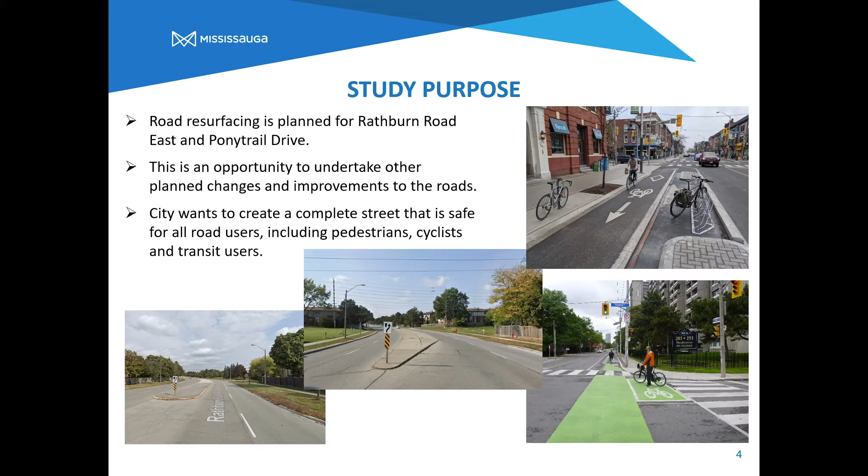The project study area includes Rathburn Road East from Dixie Road to Etobicoke Creek and Ponytrail Drive from Rathburn Road East to Burnhamthorpe Road East. Rathburn Road East and Ponytrail Drive are designated as major collector roads and a key transportation link for local movement of people within the Rockwood Village neighborhood in the city of Mississauga. Rathburn Road East and Ponytrail Drive connects both Dixie Road and Burnhamthorpe Road East. Within the study area, Rathburn Road East and Ponytrail Drive have a posted speed limit of 50 kilometers per hour.

The oldest section of Rathburn Road is east of Fieldgate Drive, which was built in 1976. Over the years, Rathburn Road has gone through extensions and improvements and is in its current configuration since 1990.

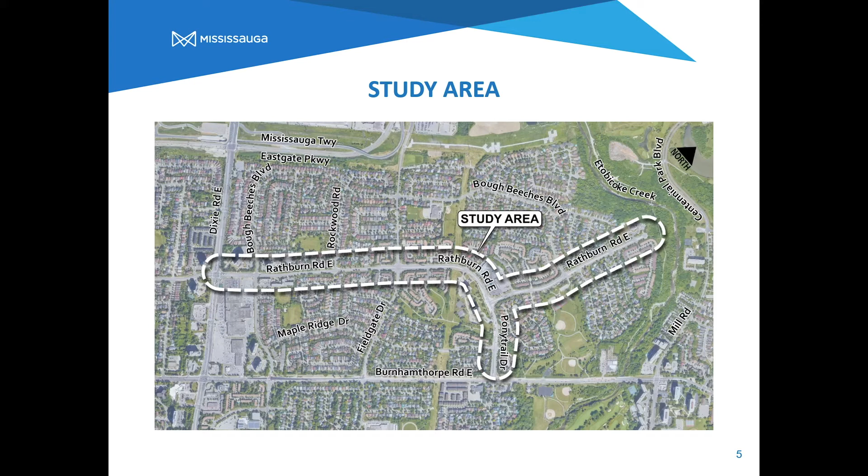As part of the upcoming road resurfacing program, the city identified an opportunity to re-evaluate and implement roadway changes to balance the needs of all road users and improve safety. By completing these projects simultaneously, rather than staggering the construction of the road resurfacing work and other improvements, it will decrease the amount of construction and disturbance to residents and road users within and adjacent to the study area.

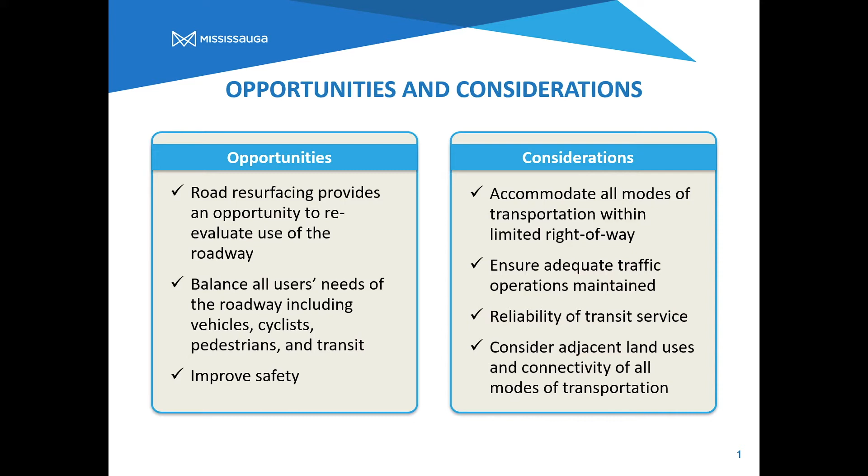Through this study, it has considered constraints within the study area, including the ability to accommodate all modes of transportation within the limited right-of-way, as well as ensuring adequate traffic operations are maintained, the reliability of transit services, and the adjacent land use and connectivity for all modes of transportation.

The implementation of a complete street design, including cycling facilities, is consistent with and supported by provincial, regional, and local plans and policies. Here are a number of relevant documents, for example, the Provincial Policy Statement, A Place to Grow, Cycle On, and the 2041 Regional Transportation Plan.

These provide provincial direction that encourages sustainable modes of transportation in suburban and urban settings. At the regional level, the Region of Peel's official plan, Sustainable Transportation Strategy, and Let's Move Peel promotes active transportation and encourages and supports building safer and more environmentally sustainable streets.

Finally, the City of Mississauga's policy plans, which include the official plan, the cycling master plan, the transportation master plan, the strategic plan, the development charges background study, and the MiWay 5-year transit service plan, all support the implementation of safe and comfortable travel for all road users, including active transportation.

The City of Mississauga's Cycling Master Plan, which was adopted by City Council in 2018, was completed with four major goals: improve safety for cycling, build a connected, convenient, and comfortable bicycle network, increase the number of cycling trips in Mississauga, and foster a culture of cycling.

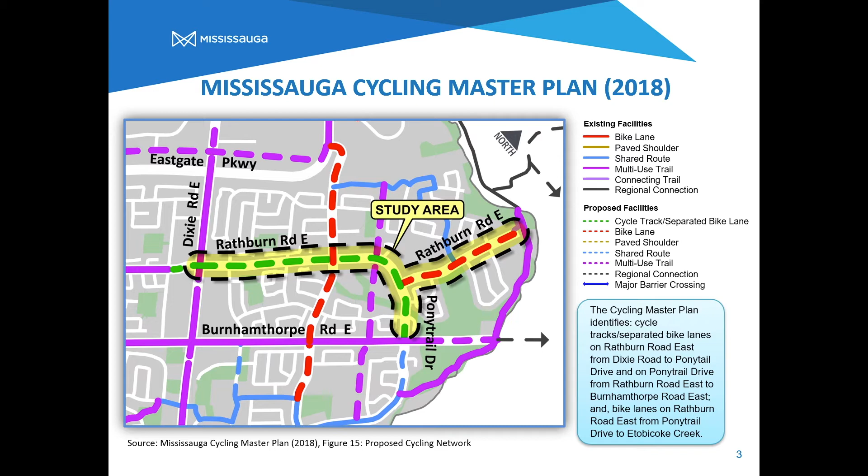The types of cycling facilities that have been identified and considered for Rathburn Road and Ponytrail Drive include on-road separated bike lanes and in-boulevard cycle tracks.

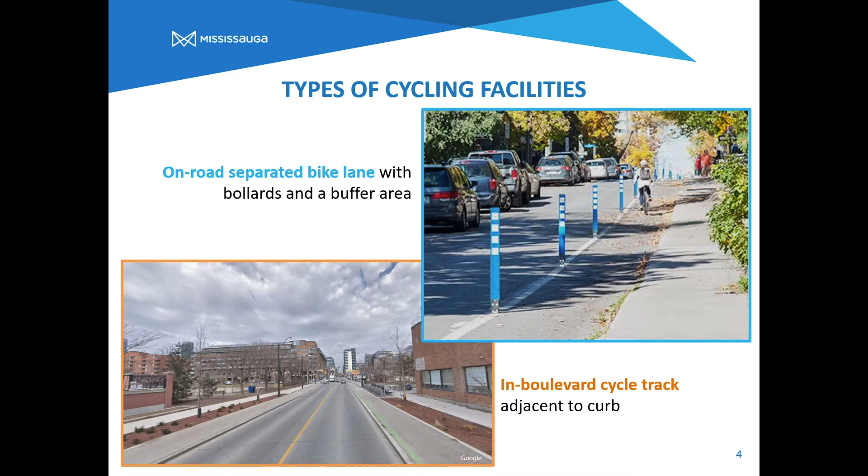The study considers the road users traveling to and from these land uses, who will be driving, walking, or cycling on Rathburn Road East and Ponytrail Drive. The connection to Etobicoke Creek Trail, as well as connections to other existing and proposed cycling and trail facilities, are being considered. Given the adjacent land uses and the need to support all modes of transportation, a complete street design approach has been applied when considering improvements to Rathburn Road East and Ponytrail Drive.

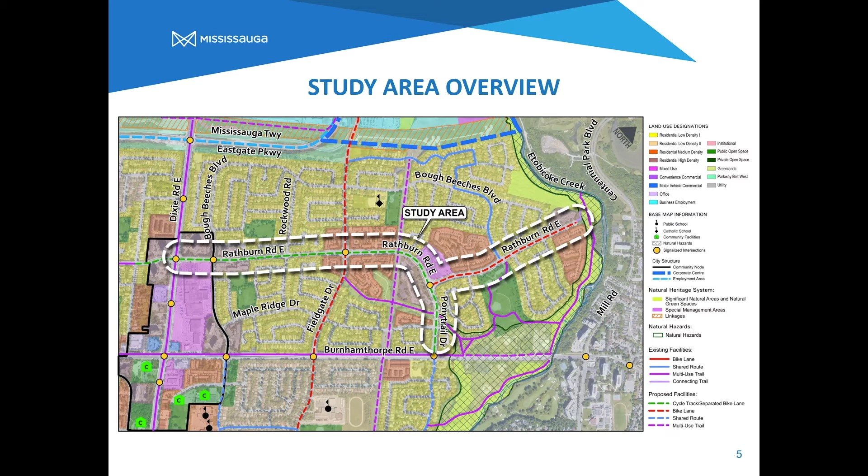Those of you who are local area residents may be familiar with the study area already. This figure illustrates the existing road and signal facilities on Rathburn Road East and Ponytrail Drive within the study area.

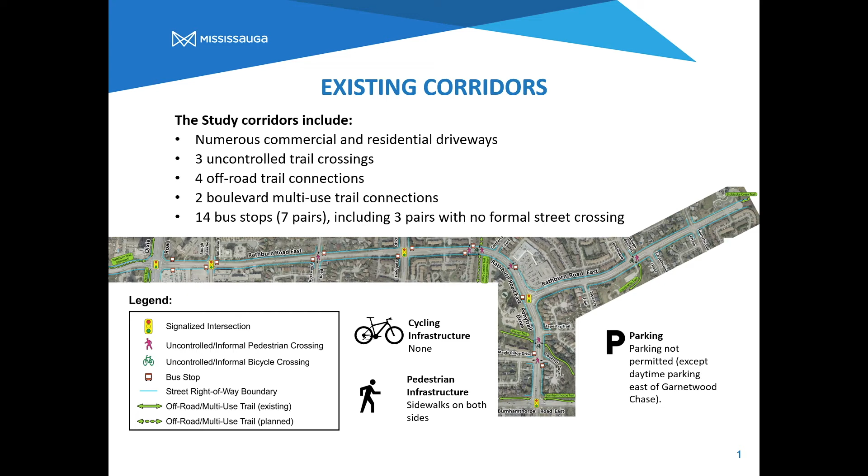The study area corridor includes numerous commercial and residential driveways, 3 uncontrolled trail crossings at the Utility Trail and Lorry Meadow Trail on Rathburn Road East and Shaver Trail on Ponytrail Drive, 4 off-road trail connections at the Utility Trail and Lorry Meadow Trail on Rathburn Road East and Shaver Trail and the Etobicoke Creek Trail on Ponytrail Drive, 2 boulevard multi-use trail connections at Dixie Road and Burnhamthorpe Road East, and 14 bus stops, or 7 pairs, including 3 pairs with no formal street crossing.

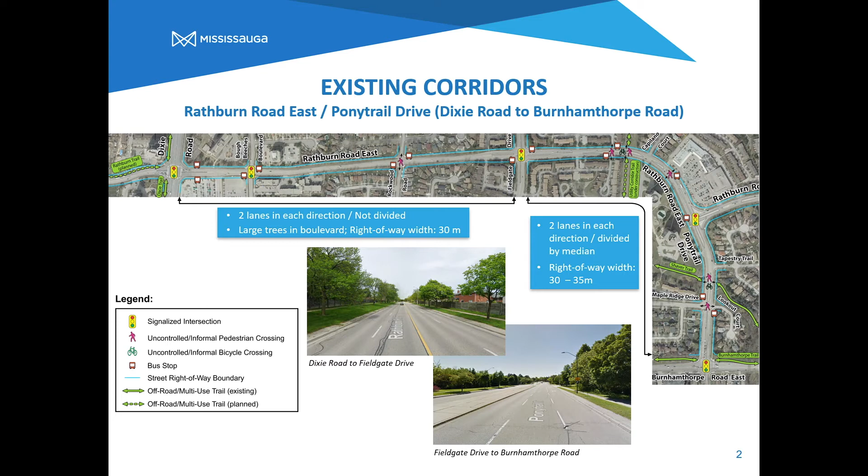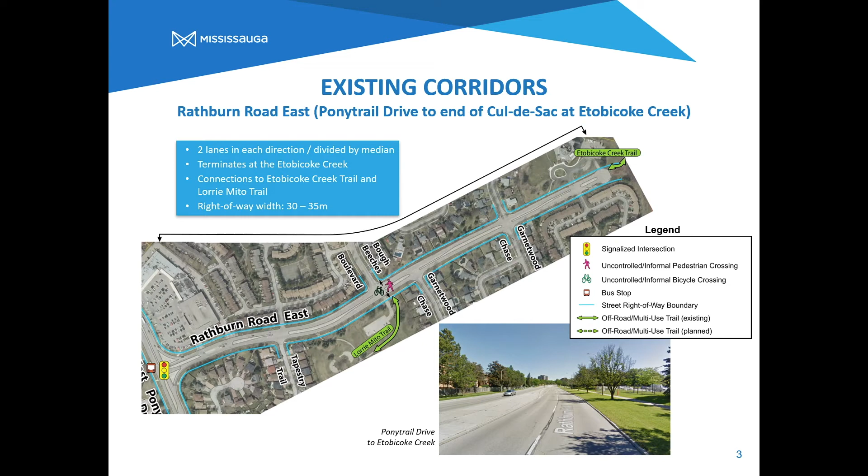A traffic analysis was completed to look at the existing and future traffic conditions of Rathburn Road East and Ponytrail Drive within the study area. This allows us to understand how the corridors are operating and how the proposed improvements to the road may impact the operating conditions in the future.

Improvements to these intersections were proposed with the safety of pedestrians and cyclists in mind, while maintaining vehicular traffic flows at an acceptable level. The improvements considered include the removal of channelized right turn lanes or dedicated right turn lanes, to reduce the crossing distance for pedestrians at the intersections, and to reduce conflict between cars and pedestrians.

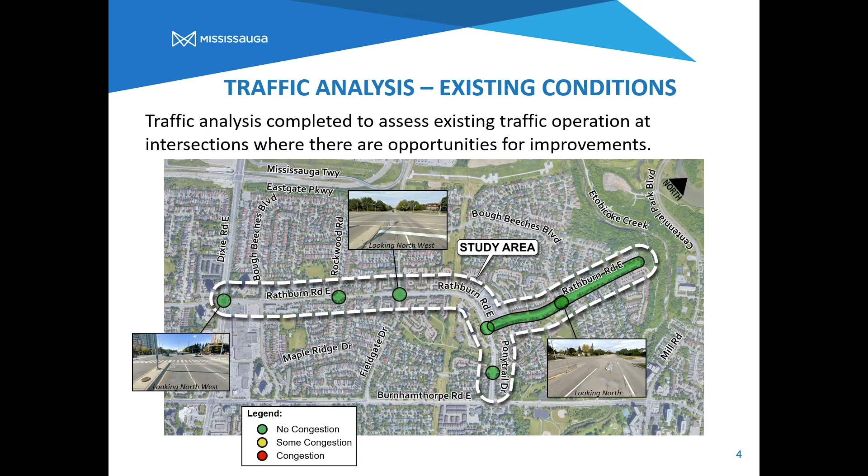The proposed intersection and road segment improvements are intended to provide safe and convenient crossing opportunities at intersections, as well as to better support active transportation use. The safety features being introduced include the removal of channelized right turn lanes, adjusting curbs, and dedicated cycling lanes through the intersection. From west to east, these are the proposed roadway improvements for the following intersections.

At Rathburn Road East and Dixie Road, the removal of channelized right turns from all the approaches. At Rathburn Road East and Fieldgate Drive, the removal of dedicated right turn lanes in the eastbound and westbound directions. At Rathburn Road East and Ponytrail Drive, the removal of channelized right turns from the westbound and southbound directions.

At Ponytrail Drive and Maple Ridge Drive or Lookout Court, the removal of dedicated right turn lane in the eastbound direction. At Rathburn Road East and Bough Beeches Boulevard East, operating with an all-way stop control.

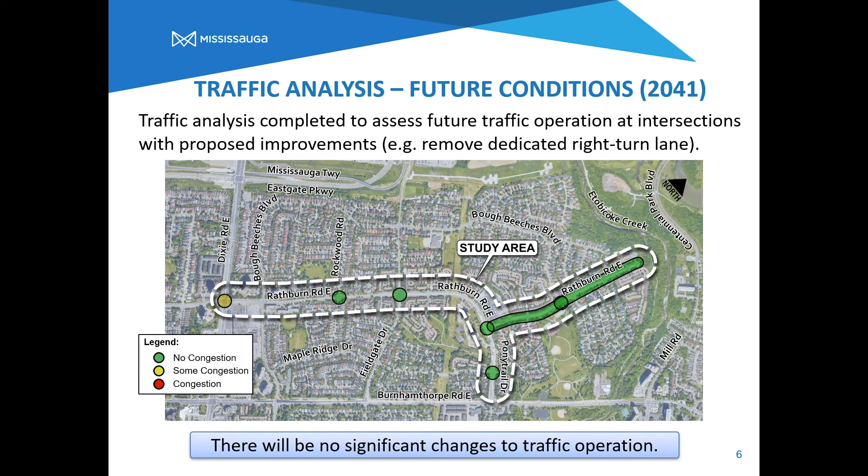The design team will be looking at ways to improve the aesthetics of the corridor by considering urban design elements that can be incorporated to create a more vibrant and inviting environment.

The type of noise wall will be developed as the design progresses and will be selected from the city's approved products list. Noise walls can provide an audible reduction in roadway traffic noise to residents directly behind the barrier. Noise barriers can be designed to be aesthetically pleasing from both the roadway and property owner sides of the barrier.

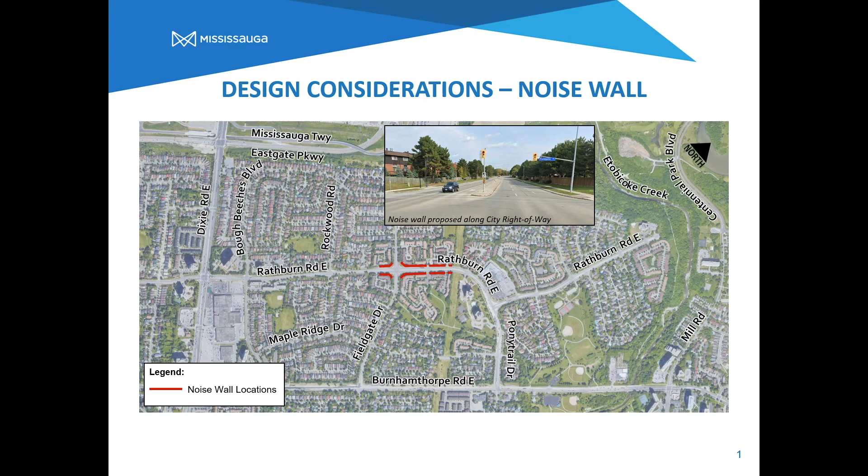The project team looked at different intersection designs to provide vehicular, cyclist, and pedestrian movements through the Rathburn Road East and Ponytrail Drive intersection. A 2-lane roundabout with boulevard cycle and pedestrian facilities was considered, but ultimately, maintaining the conventional intersection by removing the channelized right turn lanes and providing separate facilities for cycling and pedestrians was chosen as the preferred option. The removal of right turn channels alternative is less costly and has no impacts to adjacent properties.

Another factor was that the community may be unfamiliar with multi-lane roundabouts and therefore would create a more complex environment for pedestrians and cyclists crossing the multi-lane roundabout.

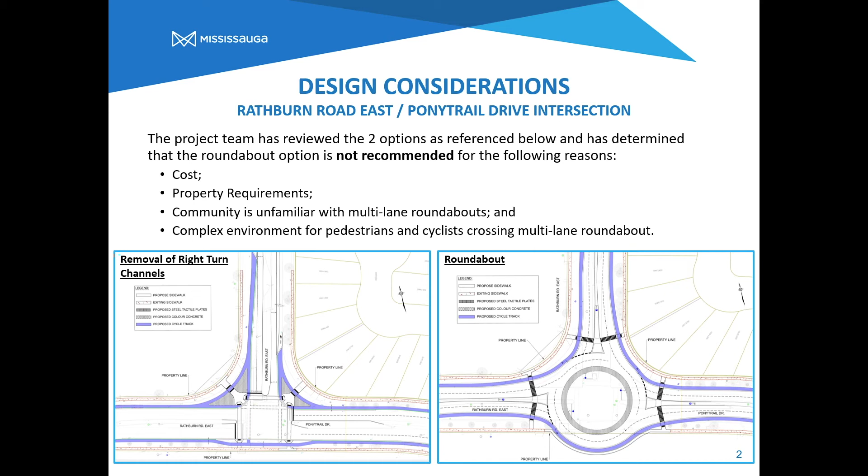To improve the safety and comfort for pedestrians, several types of pedestrian crossing designs were considered, including refuge islands, pedestrian crossovers, and signalized crossings.

Refuge islands provide pedestrians a safe spot to concentrate on crossing one direction of traffic at a time. Pedestrian crossovers provide pedestrians priority while vehicles must yield to them. Finally, signalized crossings are the popular crossing designs that provide pedestrians with priority while crossing when they are given the traffic signal to cross.

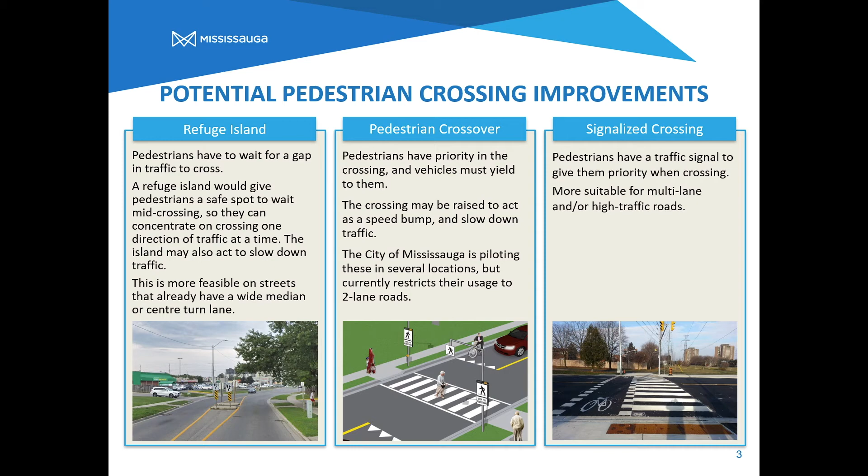After a review of where pedestrians may travel or cross Rathburn Road East and Ponytrail Drive, the project team carried out an evaluation of where pedestrian crossing locations may be improved.

The criteria included in the evaluation include safety, where pedestrians will most likely cross the road, traffic operations, width of the road, proximity to signalized road crossings, and costs.

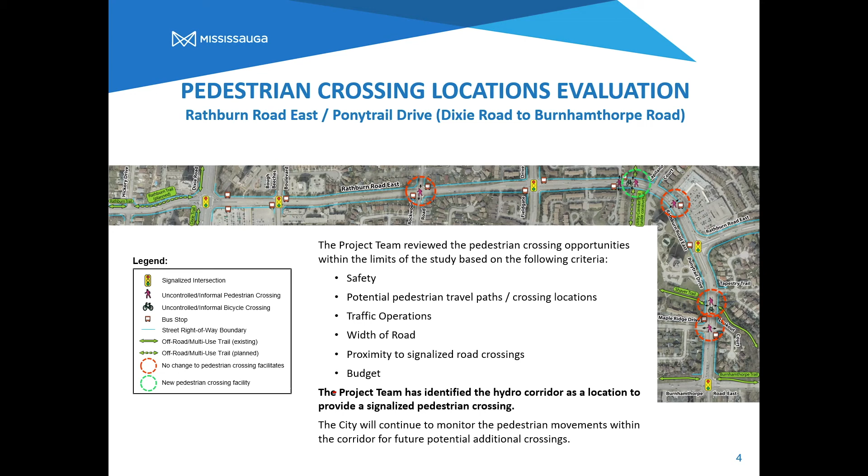This figure shows the location on Rathburn Road East, east of Ponytrail Drive, where a pedestrian crossing evaluation was carried out. The recommended improvement is a proposed all-way stop condition at the intersection of Rathburn Road East and Bough Beeches Boulevard East.

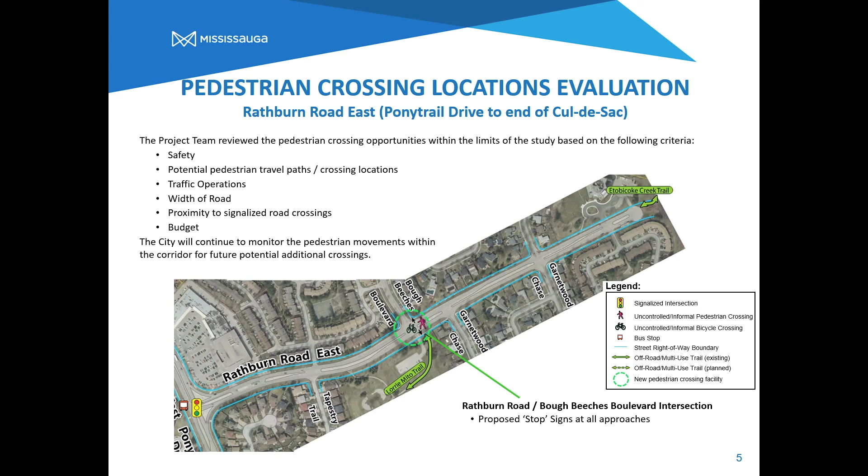In addition to identifying locations for pedestrian crossing improvements, improvements for cyclists on Rathburn Road East and Ponytrail Drive between Dixie Road and Burnhamthorpe Road were also reviewed. This figure illustrates the preferred preliminary design concept and where there are proposed changes to the road cross-section.

A one-way, 2-meter wide cycle track is proposed on each side of the boulevard. The cycle tracks are separated from vehicular traffic by the curb and gutter and are physically separated from the pedestrian traffic by a wide boulevard. In this cross-section, the green boxes indicate that the existing sidewalks and roadway will remain in the preferred preliminary design concept. The red boxes indicate where the proposed 2-meter wide cycle tracks will be located in the boulevard.

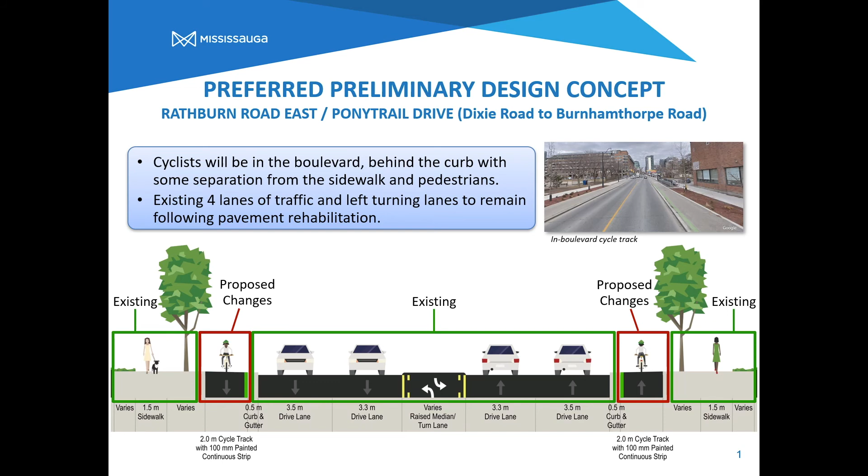For Rathburn Road East, east of Ponytrail Drive, findings in the traffic analysis indicated that traffic volumes are very low in this area. There are opportunities to reduce the number of lanes on the road and provide cycling facilities within the existing road right-of-way. This figure illustrates the design alternatives that were considered.

The first alternative is do nothing, which is the existing cross-section of the road with no changes. The next three design alternatives all propose a reduction from 4 lanes to 2 lanes.

Alternative 1 proposes a one-way, 2-meter wide cycle track and sidewalk on each side of the boulevard. This alternative proposes a left turn lane to replace the existing raised concrete median in order to provide access to side streets. There will be landscaping between the cycle tracks and the sidewalks.

Alternative 2 proposes a 2-way cycle track and multi-use trail in the boulevard, physically separated from both vehicular traffic and pedestrians. This alternative would require a complete reconstruction of the roadway. The center left turn lane will provide access to side streets. This alternative proposes landscaping between the vehicular lanes and the boulevard cycle tracks on the east side, and between the cycle tracks and the sidewalks on the west side.

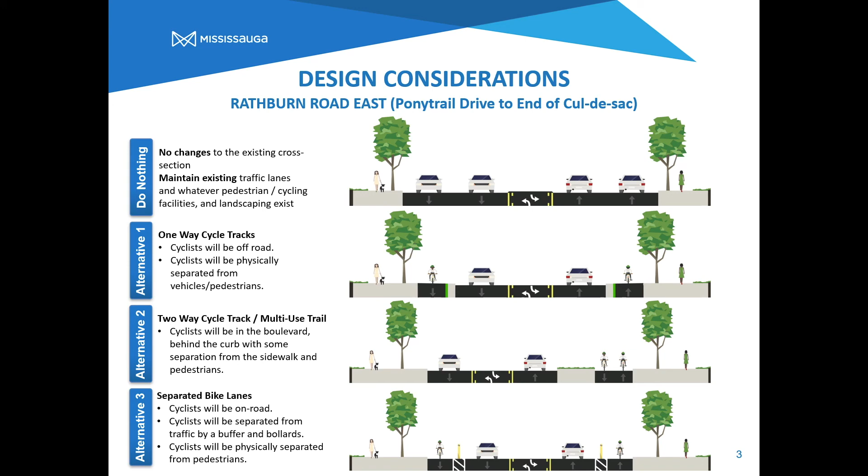The alternatives were assessed utilizing the following criteria. Socioeconomic: how it impacts the existing surroundings and provides or improves the complete street approach. Traffic and transportation: how it affects vehicular traffic and benefits all corridor users. Urban design: available opportunities for aesthetic improvements. Utilities: impacts to existing infrastructure. And costs.

Based on the assessment of alternatives, Alternative 3 ranked the best overall when considering all the criteria. It was identified as the preliminary preferred design concept.

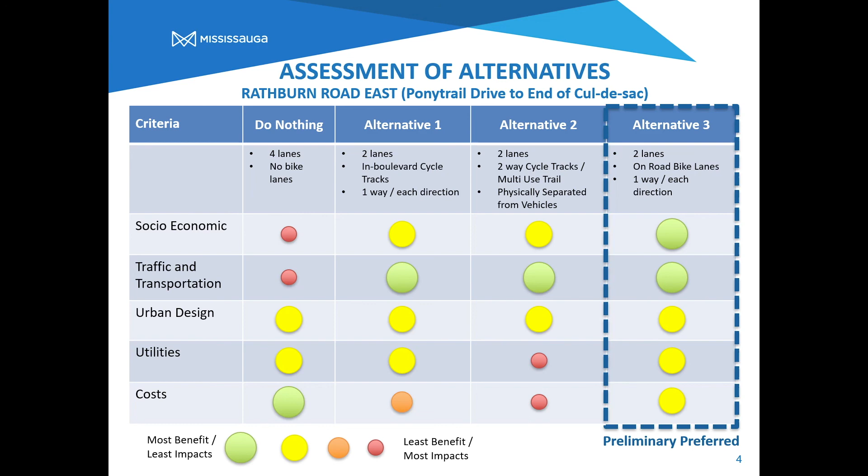Overall, Alternative 3 is the most consistent with the city's cycling master plan's vision and is less expensive compared to the other alternatives. It is the preliminary preferred design concept and will be subject to refinement based on input from members of the public, stakeholders, and technical agencies. As shown in the graphic, there is an opportunity to create some landscaping on the existing median with low-lying shrubs and/or grass.